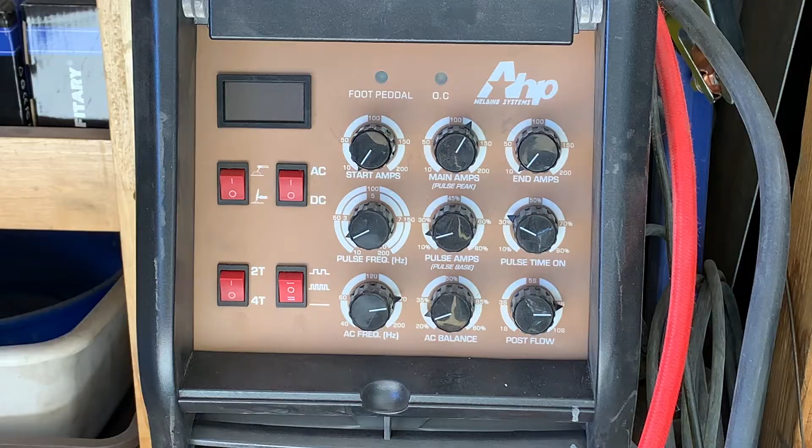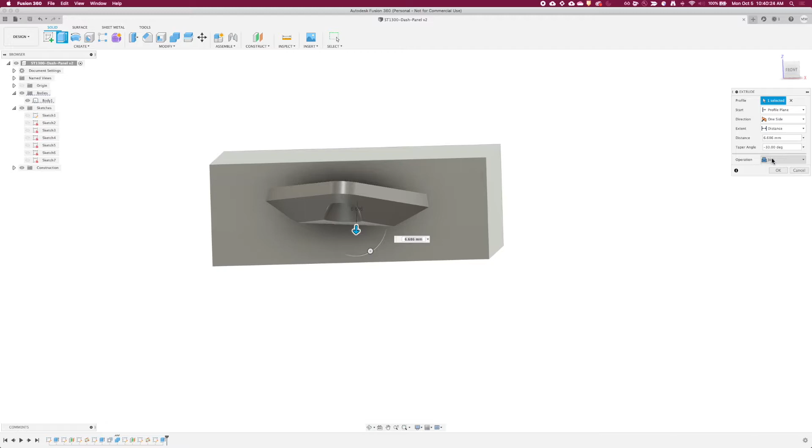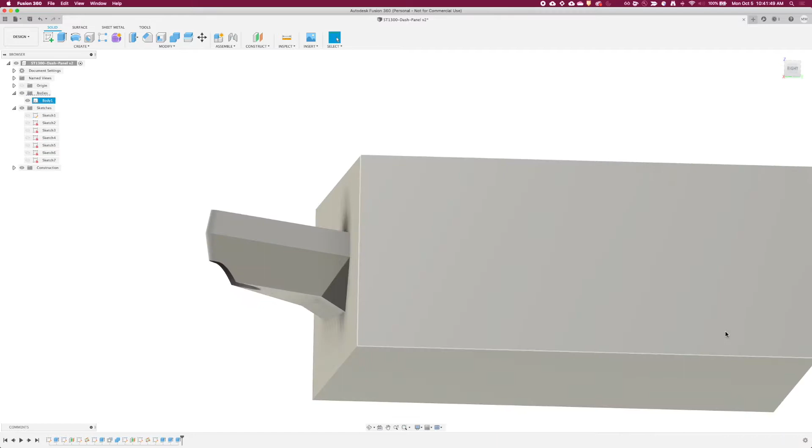Welcome back. In this video I'm going to show the finishing of the ST1300 dashboard panel that my brother-in-law sent me. You can take a look at my prior videos to see the initial construction of this model, but today we're going to take a look at finishing it out, doing all the trim work, and then copying this complex curved shape that emerges from the face of this thing, which ultimately has to fit inside a cutout on his dashboard. That's a pretty important shape to model, and in a moment I'll show you how that's done using a scanned image of the original gauge panel.

At the beginning here you can see I'm just pulling these faces down a little bit. In hindsight I should have used the extrude function and not the push-pull function, because the push-pull led to some complicated geometry that I had to repair there. But ultimately it's not going to matter all that much because I'm going to be cutting this model at the bottom of the lower tab, because I don't want the block to be too tall.

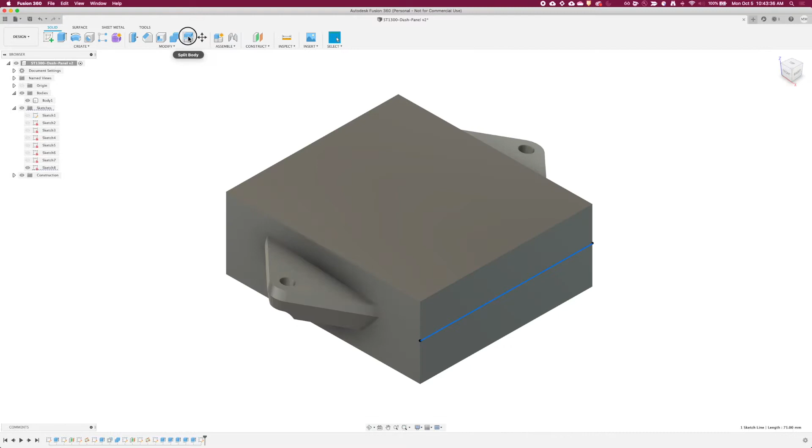So I've created a sketch on the side of the model, and I use that sketch as a cutting line to cut the bottom half of the model off. You can see there now the tabs come all the way down to the bottom with some interesting geometry that I'm going to repair here in just a moment.

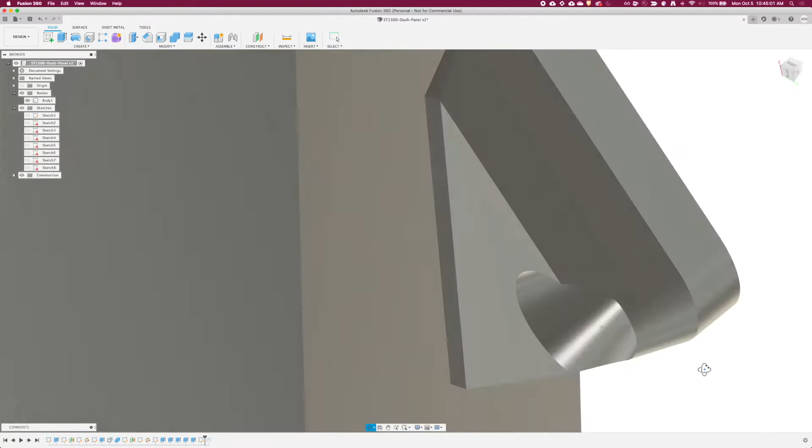This will allow me to print the model without having to rely on too much support under those tabs. I really want those tabs to be nice and strong, and having supported faces is not desirable in this case. So I'm just tapering and extruding these down so it has a bit of a chamfer to it. That way when it prints, it should print really nicely, and I'll just need a tiny bit of support under the bolt holes there.

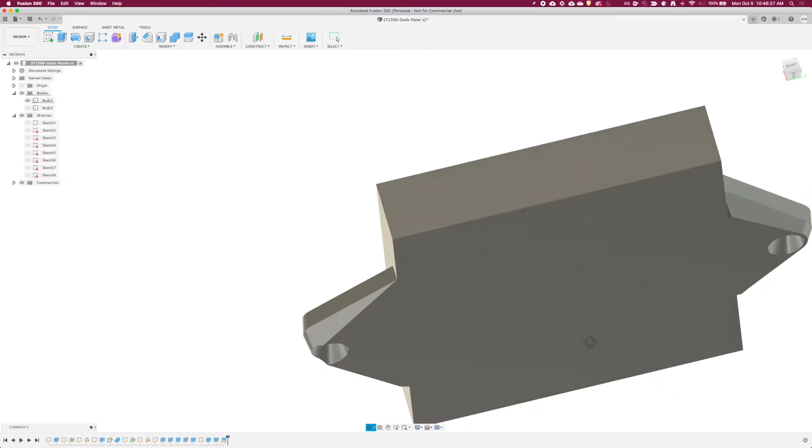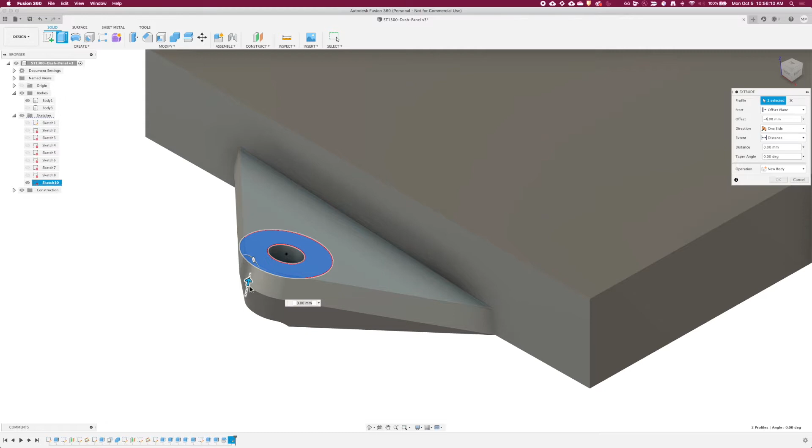Here I'm creating a sketch on top of the tabs. If you noticed earlier when we were looking underneath the model, those bolt holes had an interesting chamfer underneath them because of using the push-pull function. So here I've created a circle on top that gives enough clearance for the head of the bolt and the washer underneath, and I'm going to create an offset cut that will provide a nice flat surface for that fastener to sit on. And there we have it.

I'm going to repeat the same thing on the other side, finishing up with a small fillet on those sharp points just to allow it to print nicely without any fragile spots.

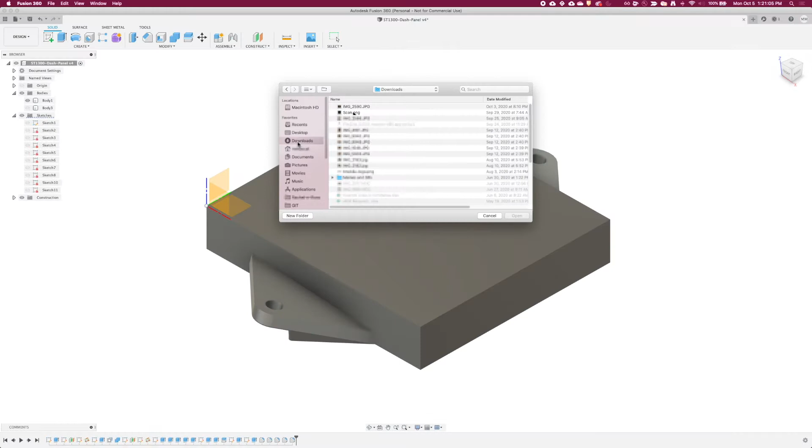Now the fun part. I'm going to import a canvas here, and this is a scan that I had previously done on my flatbed scanner. I placed the gauge on there and took a nice scan of it, and then I'm going to scale this until the edges of the square face just line up with the edges of the box that we had modeled before. The key here is to only worry about the faces that are closest to the glass.

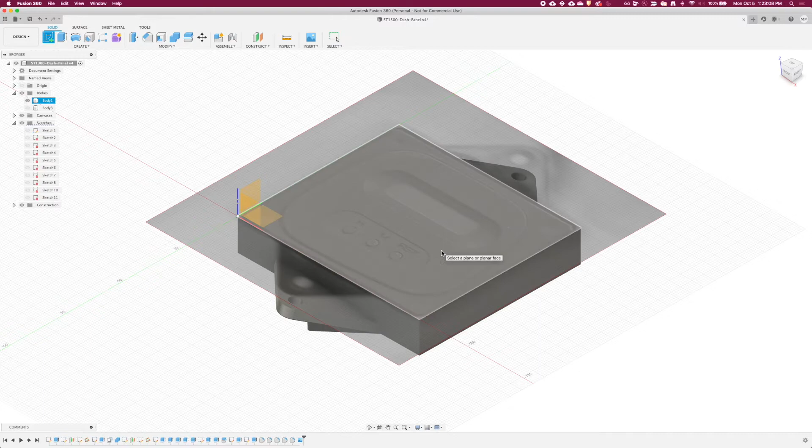You can see there that the triangular tabs do not line up, but that's okay because those weren't actually on the glass when I scanned this, so they're not going to be in scale.

So what I've done is scaled the model to the size of the square box, and now I'm using the spline tool, laying out the points that will mark the apexes of the curves and the flattest of the flat spots within that complex shape, and then I just go around adjusting the handles of each of those curves until it fits the shape of that embossed raised surface there.

Getting the hang of spline tools, or maybe the pen tool if you've ever used something like Photoshop or GIMP, can be a bit challenging and frustrating at first until you get the hang of it. But once you understand how splines work, they're a really powerful tool you can use for creating complex vector curves in any kind of modeling environment.

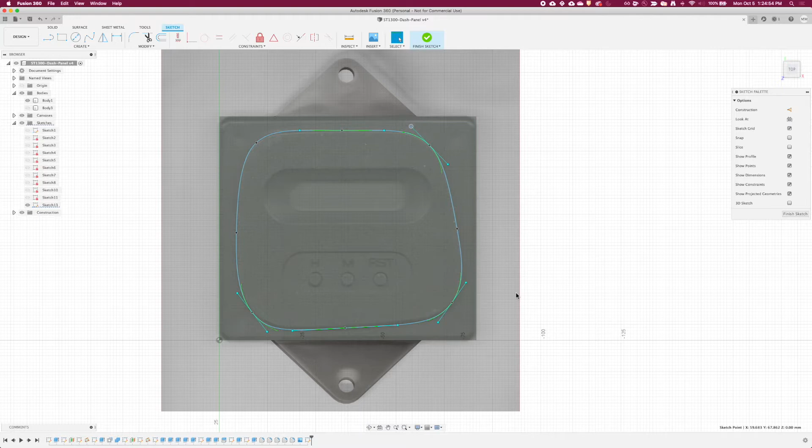So I'm just going to continue working my way around the model here, looking at the image and adjusting the splines until it fits just right. And you'll see here in a moment I'll zoom in on a couple spots and make some fine-tuning adjustments there.

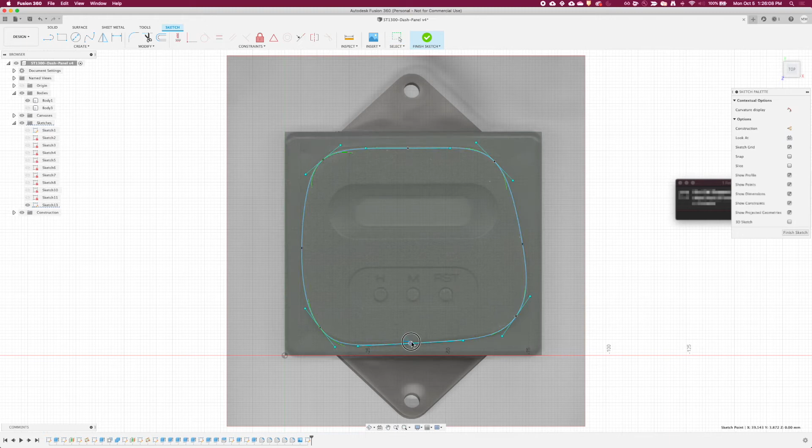It's also helpful in Fusion to adjust your zoom level, because the snap level changes depending on your zoom level. So if you need more detail and the snapping is frustrating you, just zoom in a little closer and those snap points will get finer in their detail range.

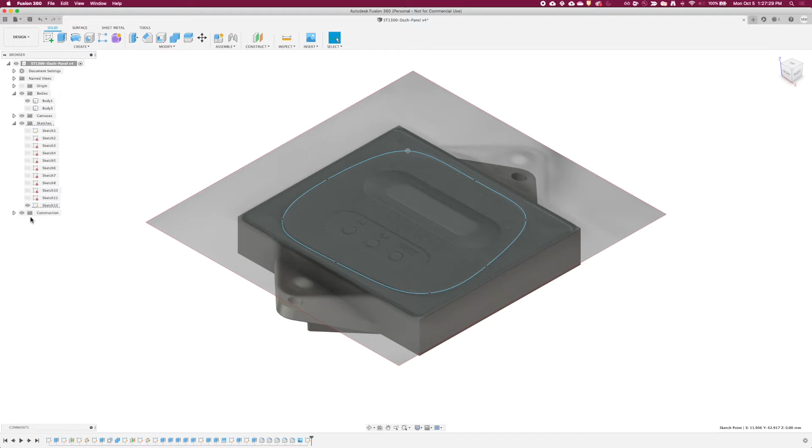You can see I'm doing that here to get this top curve to align properly. We continue fine-tuning the edges pretty meticulously, looking for the point where the shadow meets the face and continuing to adjust that.

Once I'm satisfied, I extrude this section up, adding a small amount of draft angle to it as well, just to match the original model and to give a little bit of wiggle room in case it doesn't quite perfectly fit the hole. That draft angle should help a little bit.

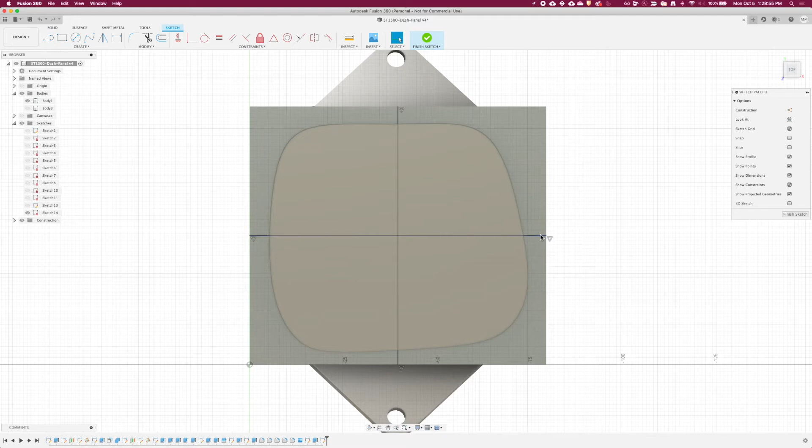Now I'm creating a sketch on the top plane of the square body, and creating midpoint lines across that rectangle to define the true center. I change those into construction lines so they're not used in the modeling itself.

Then I'm pulling up my screenshots of the new volt gauge that my brother-in-law is using to enter in a couple circles, which we will then extrude into the cutout for this gauge.

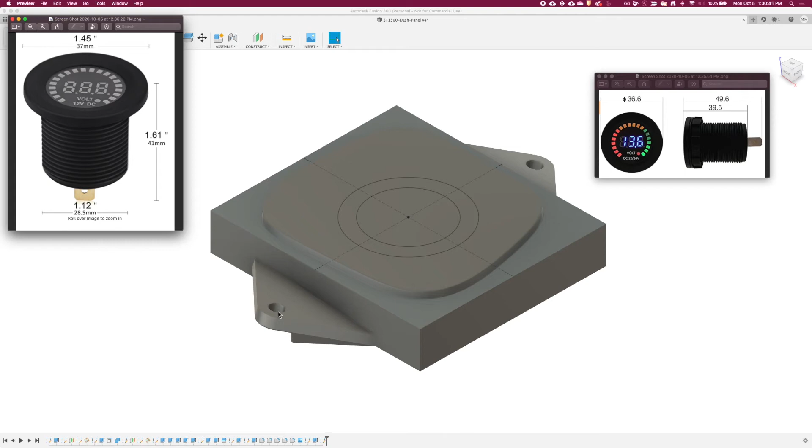I cross-checked it against a different diagram and found out that the inner hole was a little bit larger than I had originally thought, so I go back into the sketch and make adjustments to that inner hole's diameter, adding 0.5 millimeter extra just for clearance.

Then we come back and I select my sketch objects, extrude them through to cut out the holes, and repeat it again with the larger object to create the counterbore.

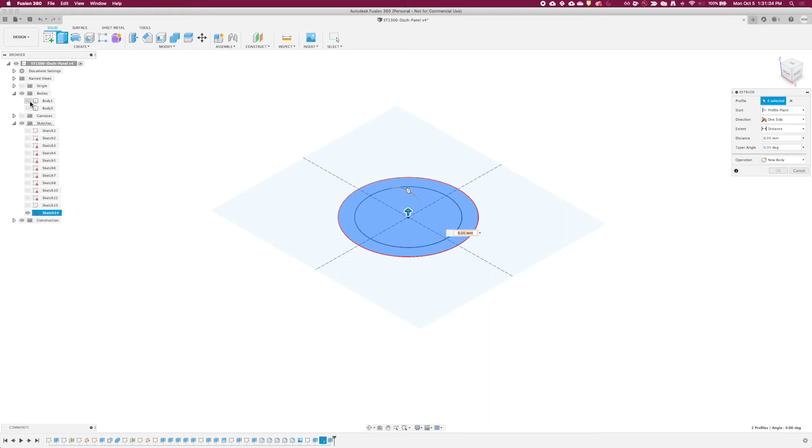Once I've selected the profiles, I use Fusion's offset function to start the extrusion from that very top plane of the curved projection and bring it down to the final counterbore depth, which you can see there.

And then we're just about done with this model, so I'm going to save it, and then go through and add the fillet radius to all of the exposed edges.

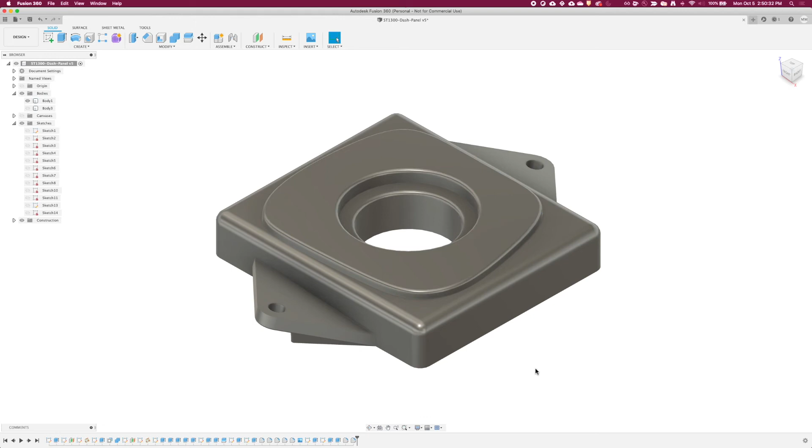Finally, adding some small fillets to the top edges and a small chamfer to the bottom of the hole, just so that the first layer printing doesn't interfere with the hole's diameter there.

And then lastly, we're just going to save this as an STL so I can print it. I'm going to choose high resolution. I prefer to save my STLs in ASCII format - I just feel like they work better on the Mac, but your methods might vary.

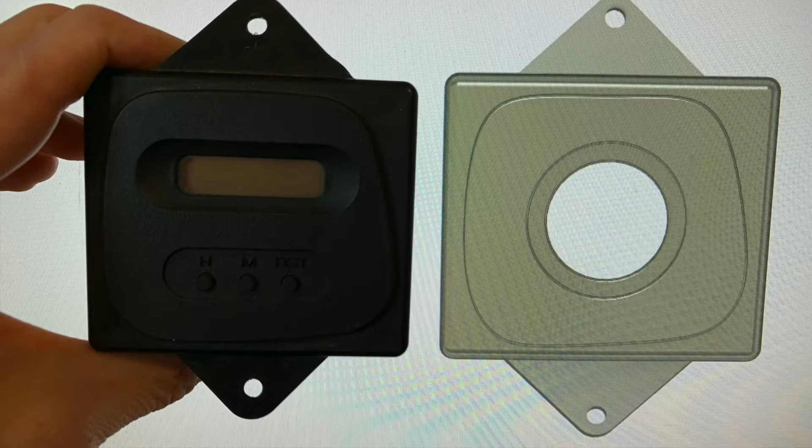So here I'm just doing some quick sanity testing against the model by using a projected image of the object against my screen at life size, just to make sure everything looks good.

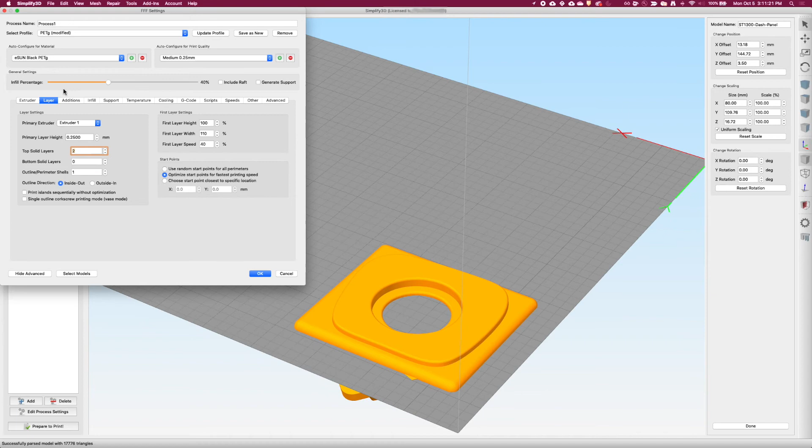Finally, in Simplify3D, I made a test print first just to make sure I had everything right. This way I didn't have to waste a lot of time printing the whole object. I just printed the top few layers and held it up to the original model to make sure everything looked right.

I didn't show the printing process of this component just because it's really not necessary, but eventually I came back and printed the whole object from top to bottom, and you can see there I'm just checking everything to make sure it fits and make sure it's lined up the way I want it.

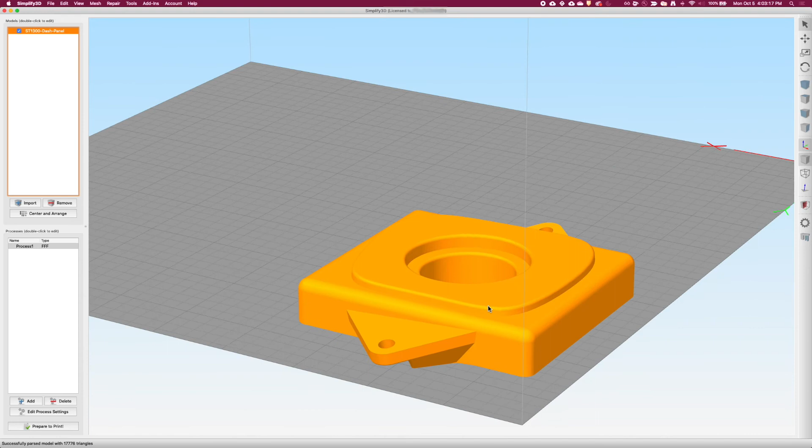And finally we will print this thing.

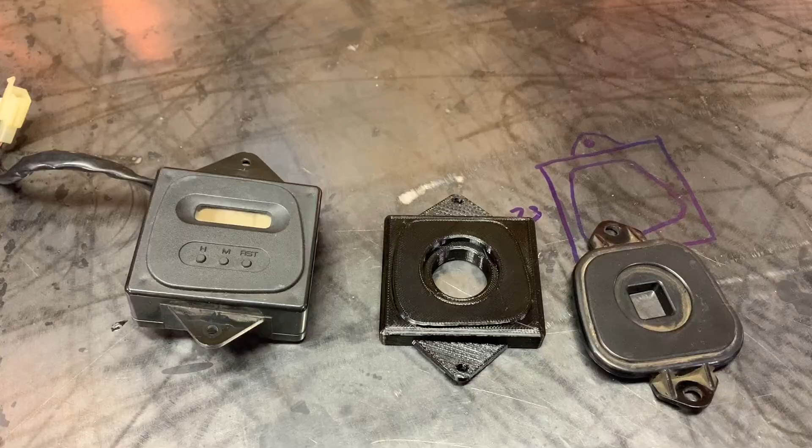There we have it. We took essentially a mirror image of this piece, but added the hole so my brother-in-law can install a voltmeter in this part.

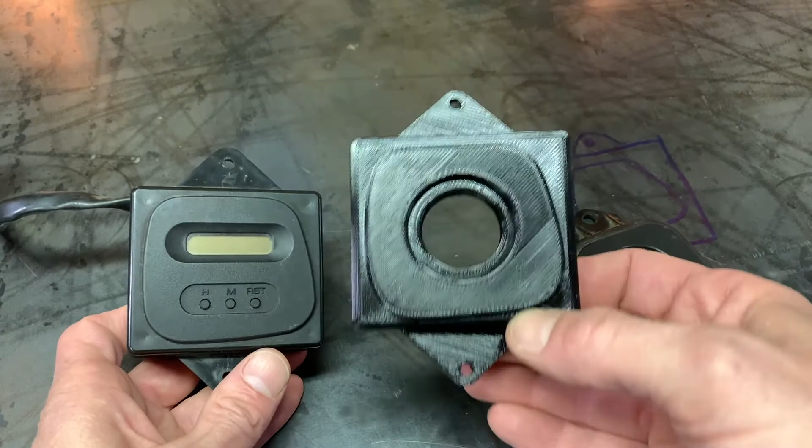So you can see here, surface finish is acceptable. I've got a little drag mark from the nozzle here, but not too big of a deal.

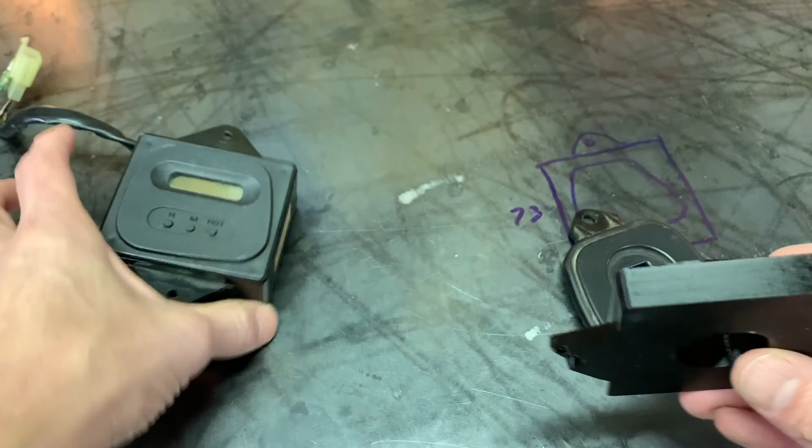Back is good. The supports came off of the relief for the screw heads pretty nicely. And if we compare them side to side, you can see we've got all those compound angles accurately captured.

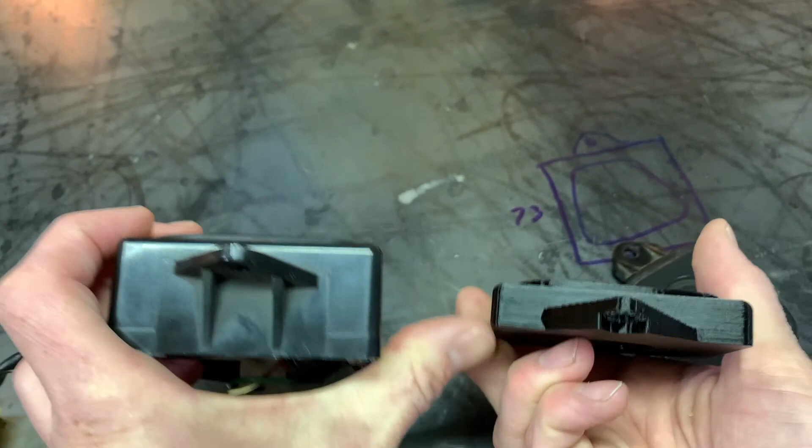Accurate enough for a flexible plastic part that sits on a motorcycle at least. So I'm excited to send this back to him and see it installed with the final product.